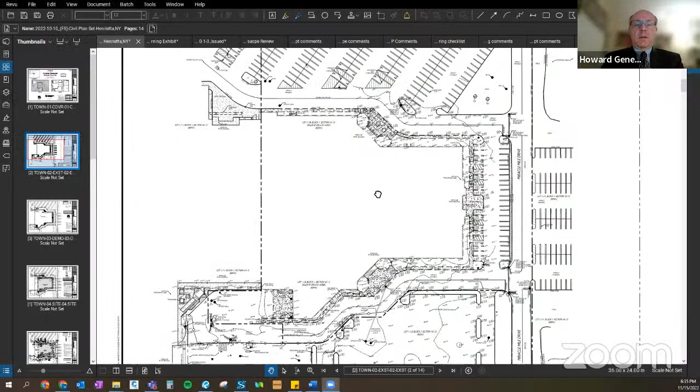Basically, the application is to... do you mind if I share my screen so I can show everyone? Sure, that's fine. Let me know if everyone can see the screen. Yes, we can all see. So the site's located along the Miracle Mile Drive loop in the Marketplace Mall, adjacent to Hylan Drive. Just for context, north is up on the page.

The existing Macy's facility is essentially abutting this property line here and takes up this part of the shopping center development. If I switch to the site plan, you can see that it basically takes up the same square footage, and the overall logistics of the internal loop roads and driveways as part of the application aren't changing. So should the existing fire truck be safe to maneuver around the existing shopping center today, it should be the same for this proposed project.

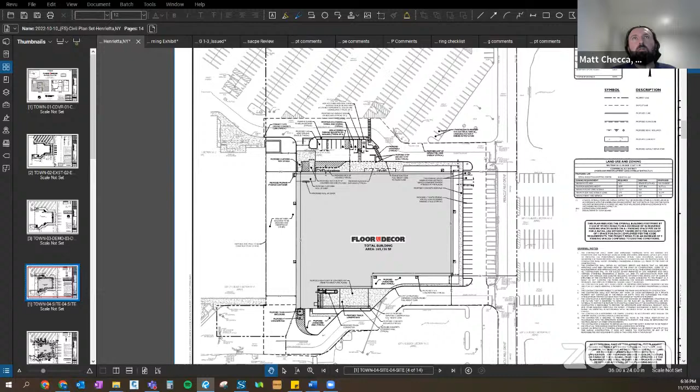Is the building going to butt up against the existing building? No, we're providing a 60-foot buffer between the existing building, just along the property line, and our new facade, between the existing shopping center and the proposed retail facility for Floor & Decor. In communications with the landlord, it was a win-win for both parties. Floor & Decor specifically likes their building as a standalone space, and the landlord requested a buffer between the existing shopping center and the new facility.

We just want to put it on record that this 60-foot courtyard space, as our internal design team is calling it, is not part of this application, and it will be permitted at a later date, subject to the application from the landlord. Floor & Decor's responsibility will only be to stabilize this area for soil erosion purposes, and I believe they're in discussions with the landlord on what type of material that stabilization will be, but it's likely to be gravel.

Does it make sense to have gravel with fire apparatus possibly having to go through there? We can stabilize the gravel and make it a little compacted. We just didn't want to put any hard impervious surfaces there due to the unknown nature of what this courtyard, or this 60-foot area, is going to be. There is plenty of maneuverability around the facility for a fire truck to access the building should there be a fire on the site.

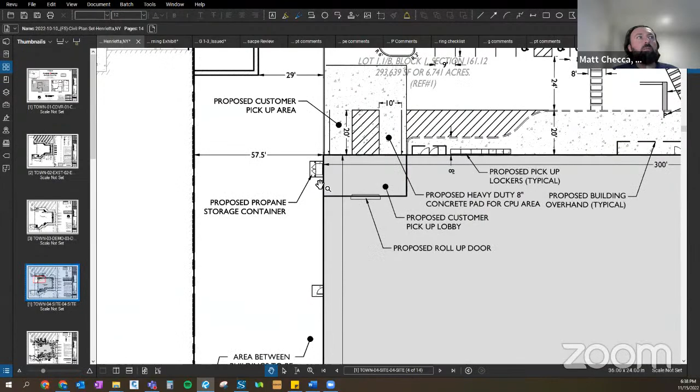Are there bollards or stanchions at each end of the 60-foot buffer? We currently don't provide any. There are some at features like the proposed store enclosure for utilities, but should that be a condition, we'll be more than happy to provide bollards if the board thinks that's necessary.

Immediately to the upper left of where you have your square there, can you identify that for me, please? What was that square you were just circling?

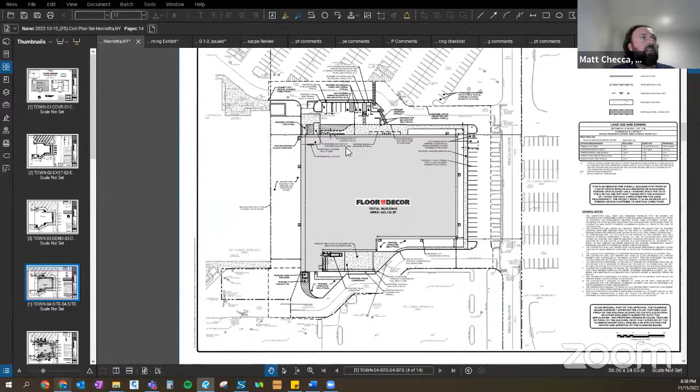Sure. So this existing utility enclosure is transformers and electrical equipment. The proposal would be to remove this screening wall around these utilities. Currently on site, if we go to the street view, it's this enclosure here. So what we're proposing is removing this enclosure so we can get free access to the utility enclosure, and then we are rebuilding a similar screening wall in its place. This will be a brand new enclosure as part of the project.

What we're proposing to do, if we switch to our landscaping - one of the comments from the Conservation Committee was to screen this area, which we have no objections to. We were planning on screening around that enclosure to make it more appealing to the public eye. Screening with what? Just low level planting, some evergreen trees, a variety of plantings based on the plant schedule and the town requirements.

So you're removing the existing brick wall. Are you putting back any hard surface as well? Yeah, there will be a brand new screening hard surface around the utility enclosure, and then we're proposing further screening just adjacent to that wall. Very good, thank you. That's what I was alluding to as far as the hard surface. Will it be brick? What will that hard surface be?

The enclosure, yes. Julie or Elizabeth, do you want to speak to that? I'm not too sure - basically matching the materials that were passed around, matching the new building, etcetera. Understood. I'm just going to turn it to the applicant who's here on the call, he can probably answer that a little more efficiently than I can.

Yeah, this is Julie Starzinski, Director of Construction and Design for Floor & Decor. Last name for the record: S as in Sierra, T as in Tango, A as in Alpha, R as in Romeo, Z as in Zulu, Y as in Yankee, N as in November, S as in Sierra, K as in Kilo, I as in India. So we're actually planning on using CMU, and then we will end up painting it to match our existing building colors.

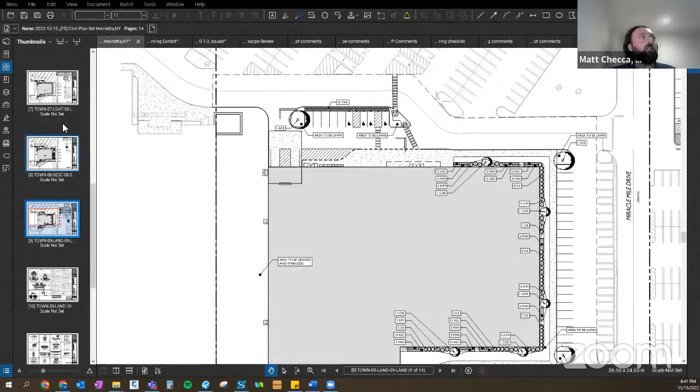I'm all set, thank you so much. Thank you. The chair will recognize Mr. Eckert. Thank you, Mr. Chairman.

To piggyback off that same comment, the building's not CMU, it's precast, right? That is correct. So you're going to use CMU but just paint it to match? That is correct. It should be an Urbane bronze color by Sherwin-Williams. But it's not shown on the elevation though?

We will make that updated. It should be. All right, well, I guess I'd like to go back to one of my first comments here.

I guess I was understanding that the main entrance to this building would be facing east towards Hylan Drive. I don't know if that was a previous submission or concept that's come through and now it's facing north.

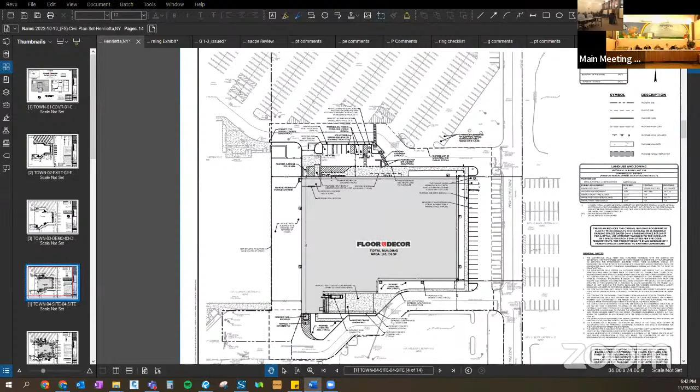The existing building currently faces—this is our existing conditions plan—the existing building does face to the east, the main entrance, and it's easier to show on an aerial, that's why I keep switching back to this. But the main entrance as part of the Macy's facility was located to the east. There are two separate entrances to the north and south.

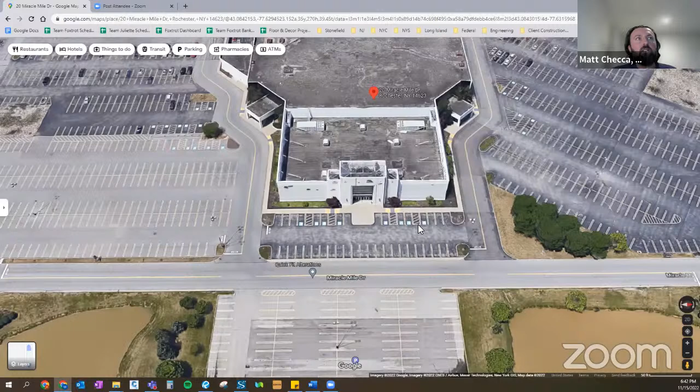The plan would be to demolish these two entrances and remove the main entrance as well as the ADA parking spaces. Swapping to the site plan again, the main entrance now faces the main parking lot to the north. In replacement of the existing side entrances to the Macy's facility, we're making the building a little smaller, so we added a parking lot in replacement there.

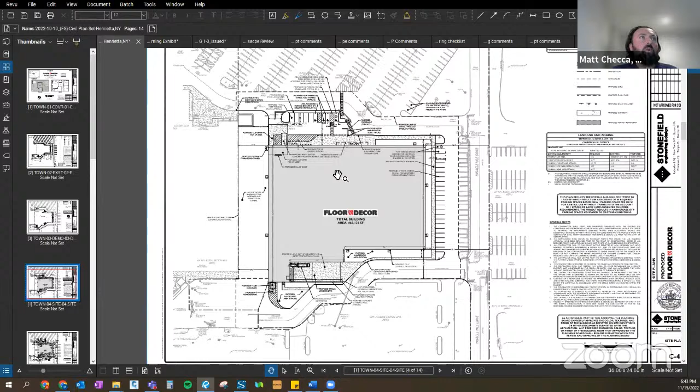Similarly to the south, we are mirroring the loading bay, and the loading bay will be facing west, removing that existing entrance that's currently there. It's important to note that this layout does reduce impervious surfaces—we are increasing pervious landscape surfaces by approximately 18,000 square feet, which is a little over a quarter acre.

Yeah, I understand that, but I thought I saw a concept before that came across through the town that showed the main entrance to the east. I'm not too sure, I don't think that was something that we prepared, no.

We did have an administrative review a few months ago, about 6 months ago, but that was a proposal to keep the existing building. Due to some construction issues that were encountered, the plan is now to demolish the existing building and replace it in kind. Maybe that's what you're referring to, but the plan has always had the existing entrances to the north of the project area.

I'm not sure I understand why the storefront would be to the north side instead of the east, which is the main street frontage at Hylan Drive. That would make the east facade the standard facade—just a very blank wall with coloring facing the main frontage to Hylan Drive.

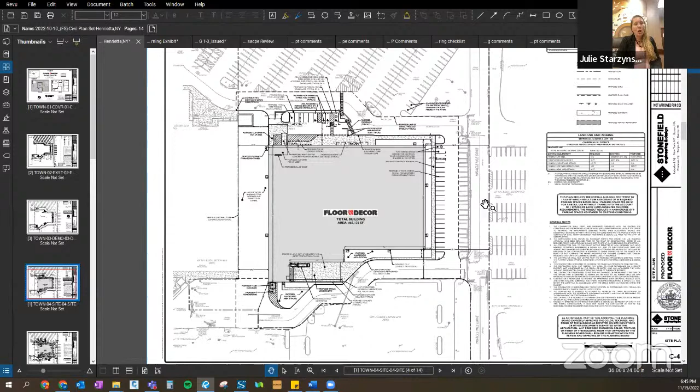Yeah, I can answer that question. In discussions with the landlord, he's thinking about putting an out parcel in the parking lot closest to Hylan Drive. So we needed to change our storefront entrance to the north side of the building so it's visible to the public.

I'm sorry, what's that out parcel now? The landlord is thinking about putting an out parcel—he hasn't gone into specifics, but when we talked with him he said he wanted to make sure our entrance was visible, that's why it's on the north side. So if the landlord decides to put an out parcel in the parking lot closest to Hylan, there's that option and it won't block our entrance.

Okay, well that would still have to be approved by the planning board, and now we're going to be looking at a solid wall towards Hylan Drive. You're putting the side of the building towards the main thoroughfare of Hylan Drive.

That is correct, we are. And right now the landlord has not given us any sort of timeline for that out parcel, so I don't know if he's putting that in with the 60-foot corridor between our space, our courtyard, or if he's doing that at a different time.

I'm not going to vote in approval of a project that doesn't put the store frontage towards Hylan Drive. It's the side of a building, a concrete solid wall that's going to look terrible to Hylan Drive. The store frontage going north isn't going to be visible from Hylan. It's barely going to, and at 1,000 feet away, it's not going to be visible really from Jefferson.

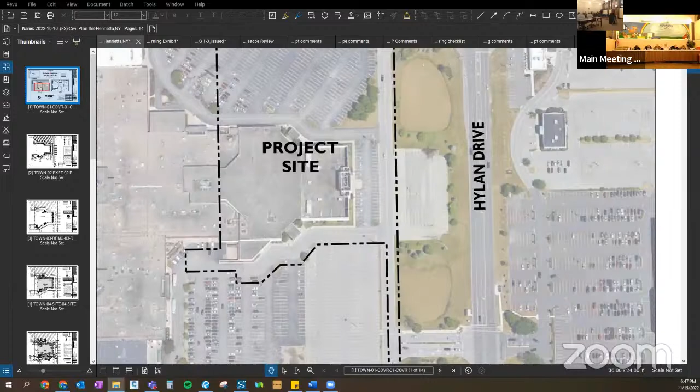Being at the site and navigating around it, I think that entrance on the north side is very visible, especially from the intersection with the traffic light. Using your same methodology, on the north side there's an out parcel up there now that can be built on, which was already approved, in fact approved for another restaurant that went elsewhere. There's an out parcel there that would block that frontage as well. Will it block it to the north? Yep, well it would have, but now you're going to own that northern parking lot, correct?

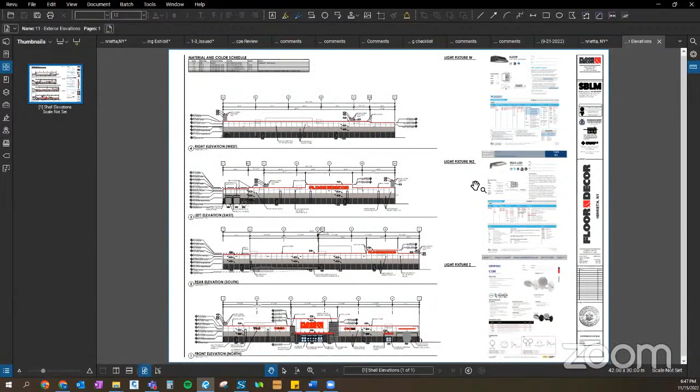If I could jump in, this is Eric Wright with Wilmer Wright, Vice President Construction. Julie is correct, we do hope to develop an out parcel in that parking field to the east. In addition, having the main entrance on the north side is driven partially by the parking fields to the south being controlled by the University of Rochester. So naturally the retail corridor and parking areas are to the north of the site, as opposed to split between the north, south, and east.

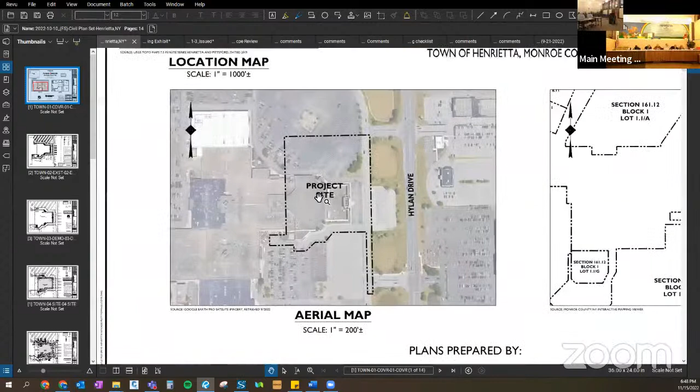Do you have more of a satellite image on that? Can you go further to the north? So the black line—okay, go back to what you had. Is that black line your limits of disturbance? No, that's the property line. Our limits of disturbance is basically just around the existing facility. So just north of that black line is that rectangle going north. There you go, that's the out parcel.

Eric, I understand that, but the out parcel on Hylan Drive never goes through, and the side of that building is always facing Hylan Drive. We're looking at a concrete wall, which I'm not in approval of. I don't know why we can't either dress it up or make it look like a storefront. I don't know why it would be moved—the storefront's been at Macy's for decades, on that east side, and nothing's ever been put into that out parcel on the east side. Putting the main entrance on the north side instead of to the east towards Hylan Drive doesn't make any sense to me. I don't know why we can't have store frontages facing our main thoroughfares.

So I'm okay with dressing up that elevation, but I cannot have an entrance on that side. I want to make that perfectly clear—we are a one entrance building. I can definitely dress that elevation up and make it look more presentable to that drive, but there will not be an actual storefront there.

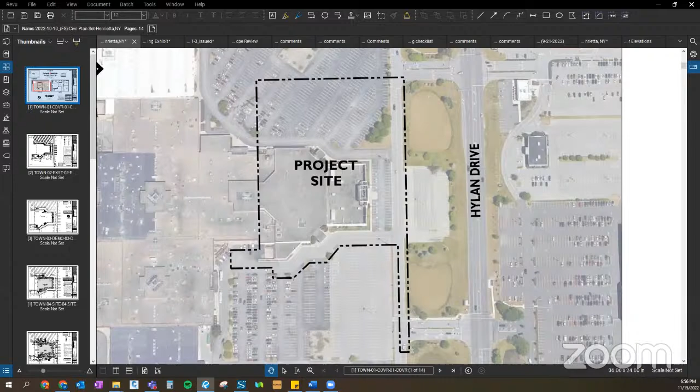That sounds fair, Mr. Eckert. Is that amenable to you? Yeah, I'd like to see that on the plan so we have an understanding of what it's supposed to look like before I vote on it. But I'll be frank, I'm not going to vote to approve this project without the store frontage facing Hylan Drive, or at least a large change in the facade, which we're not seeing right now. The store frontage should be on Hylan Drive like everything else up and down Hylan Drive. So those are my comments, sir.

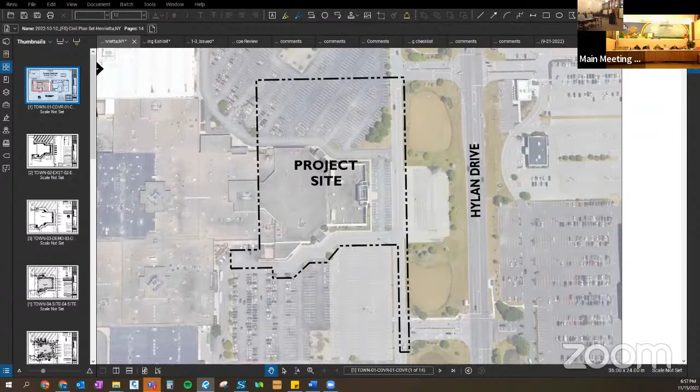Are there any issues with that? No, we spoke with our landscaping team and they have no objections to the comments. The only discussion point is based on the requirements, and one of them was in the comment letter. There was discussion about the landscaping needing to be 10 to 15 feet away from the foundation of the facility. I don't think we'll be able to meet that due to site constraints. However, we do show plantings along the foundation just to add more green to the project. That was one of the discussion items we had with the Conservation Commission. So that was really the only one we had objection to.

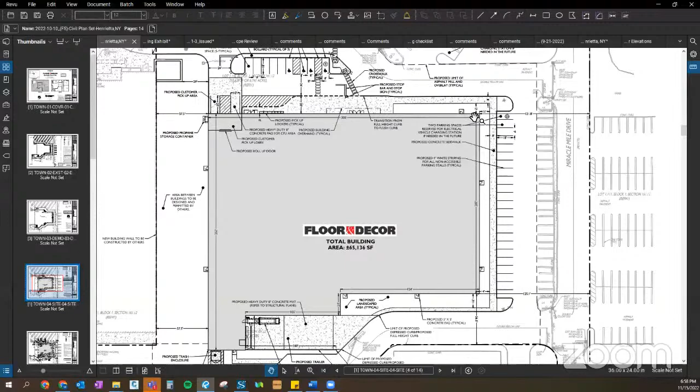All right, how long is the land lease on this project? Julie, can you answer that? Eric, I think we had done a 15-year lease, is that correct? Yeah, I believe it's a 15-year base term with options to extend, but it's a minimum of 15 years. All right, thank you, no other questions, Mr. Chairman.

Thank you, Mr. Barley. The chair will recognize Mrs. Reynolds. I only had a question at the time about the space between the buildings, but those have already been addressed, and will be discussed further. I have nothing else at this time. Thank you, Mrs. Reynolds. I've just got a quick comment here.

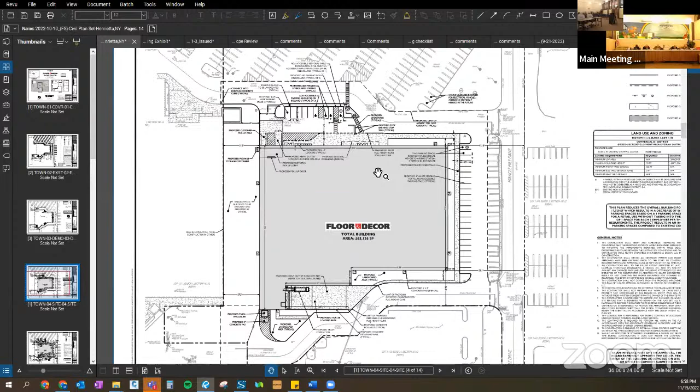I'm sure you saw Mr. Wilson's comments indicating that the fire department connection location is not ideal, as it is hidden on the fire department approach. Chris, can you weigh in on that and give us some perspective? Is it dangerous where it is, or would you prefer to see it more visible? I don't know if it's hidden or just not easily identified where it is now. I know the fire department wants to pull up and know exactly where it is. So what I'd suggest is that the applicant work with the fire marshal and Kevin to come up with a location that's acceptable.

Yeah, we have no objection to that. We'll be more than happy to work with the town consultants to provide a useful area that meets everyone's needs. Okay, and to go back and piggyback on Mr. Eckert's comment a little bit, Julie, what thoughts might you have for dressing up that side of the project? Do you intend to have a sign on that side of the building?

Yeah Matt, can you go back to the colored rendering again? Building elevations, thank you. So which one are we looking at? The east side, right? Second one down. The second one down right here. So you have the truck bays towards Hylan.

I should point out that we haven't completed our signage analysis yet, but there will be some sign variances required for number of signs overall for the business, and some of the wall signs, the larger ones that say Floor and Decor, will likely require variances for sign area. We intend to apply to the Zoning Board of Appeals for those variances once we finish the site plan process.

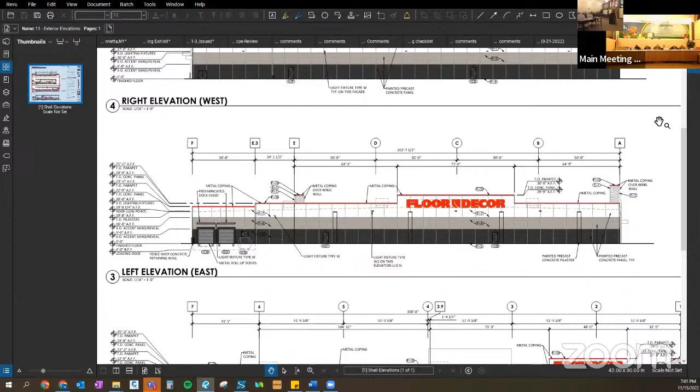Okay, can you go back to the front elevation, or would that be the north elevation? Just to compare the two. Whatever you can do to make it look like the front of a building is what we'll be asking. We can definitely look at that.

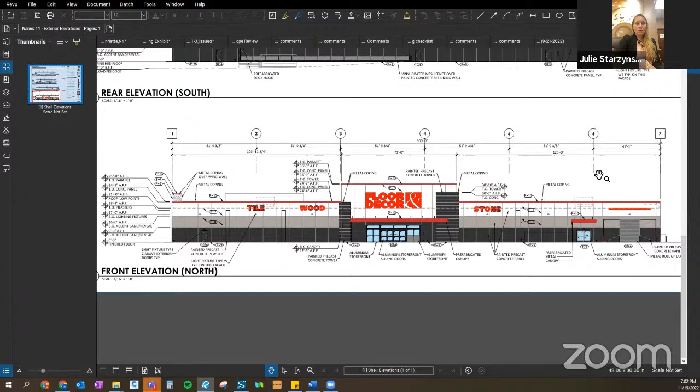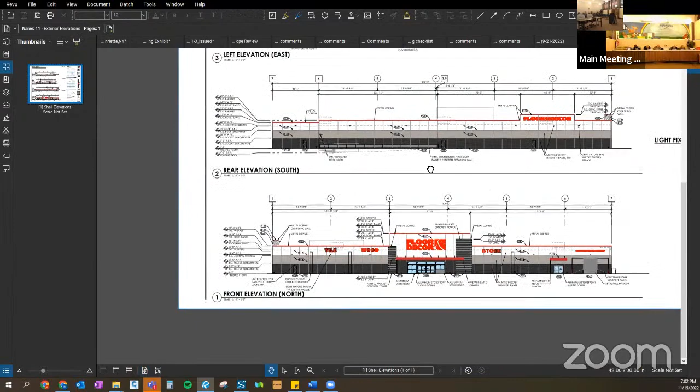I don't know if it's concrete towers or something to tie the front, or the north elevation, to the east elevation, but I can see Mr. Record's point - it would be nice. That's going to be a highly visible building elevation, and it would be nice to dress it up a little bit. Yes, we will take that away and dress up that elevation.

Okay, so Chris, can we? I know I agreed with you, right? I mean... I wrote that down for the...

But I think the main concern I see is the building elevation and the courtyard, and I think we can get some resolution on both of them. In the courtyard, we could bring that back as a discussion item, but for the board's review as well.

A conditional approval would be optimal from the applicant's standpoint. We'd certainly be happy to work with your professionals, or to bring the elevation back to the board if the board wanted to review it or have further discussion. But a conditional approval would be very helpful in terms of expediting the project and getting construction underway sooner.

And what if we do a conditional approval to review the plans in the courtyard and east-facing building elevations, but we are not able to come to an agreement?

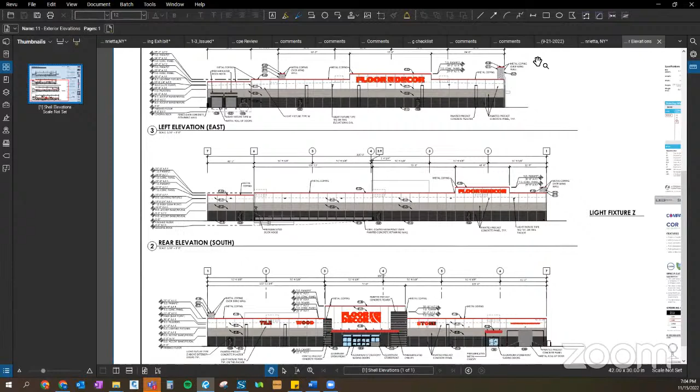Well, presumably the condition would require that the ultimate resolution of the so-called courtyard space, as well as the building elevation facing Hylan Drive, would be revised in consultation with the board or its professionals to either its professional satisfaction or the board's satisfaction, however it was worded. And if those conditions were not satisfied, then the approval would have a condition that wasn't met.

So like, we couldn't - exactly. Yep, like a total deja vu.

Yeah, if I can interject - practically speaking, we're back here in a month. Practically speaking, what's going to happen if we get a conditional approval between now and 4 weeks from now?

Well, if we had a conditional approval, that would enable us to begin and commence the appeal period. It would enable permit applications to start moving forward in terms of demo. So there's a lot that could be happening during that time period that would help the project move along and be completed more quickly.

And if you're unable to secure the approval of the board with the proposed revisions to the courtyard and to the Hylan Drive facing elevation, where's that going to leave you as the applicant?

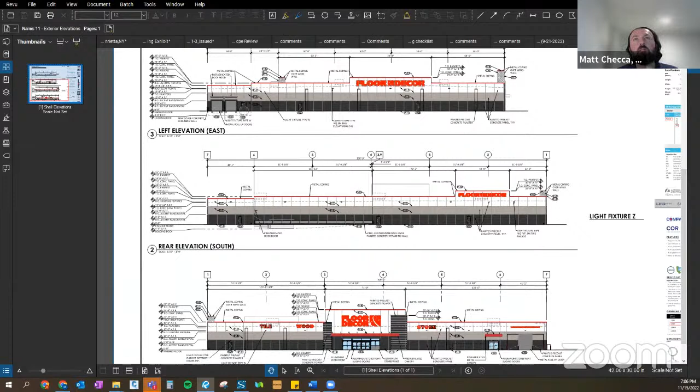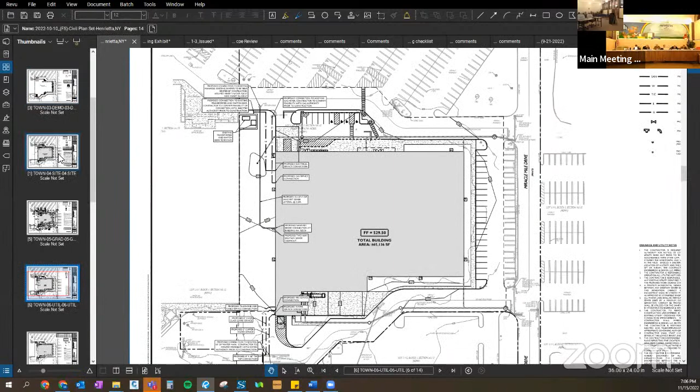And I have a question, and I'm not sure if this is for Eric or not, but whose responsibility is it going to be to make that courtyard nice? Make it a lovely walkway, put benching on there as a walkthrough. I just brought up the images that are out at Eastview to kind of share with some of the folks sitting next to me. There's really nice grasses and landscaping along that walkway. Is that the responsibility of Wilmorite?

Yeah, that would fall on us to make sure that when we decide what we're doing, we turn it into a beautiful space, but also maintain it as a beautiful space. So I think we can make that commitment that we would maintain whatever is being proposed there as an ultimate solution. But we would also maintain this temporary area that we create with the grass area and stone walkways. And I think that can be a great interim amenity as well.

And this is our, it will remain our property. So basically the leased land will be the edge of Floor & Decor's building, and it'll be our responsibility to maintain that.

Okay, thank you for that. Mr. Mastrella, do you have any more comments, sir? No, so yeah, I mean, based on what I've heard, my suggestion would be that if there is going to be a conditional approval...

...that it be with the understanding that the planning board is going to approve the elevation, so actually the east and west side of the building, the courtyard and the east elevation. I don't think that's something that you can, on a project of this scope, leave entirely to staff. That said, it doesn't mean it's going to take a world of work to get there, but obviously, the sooner you see it, the better off everybody is in this.

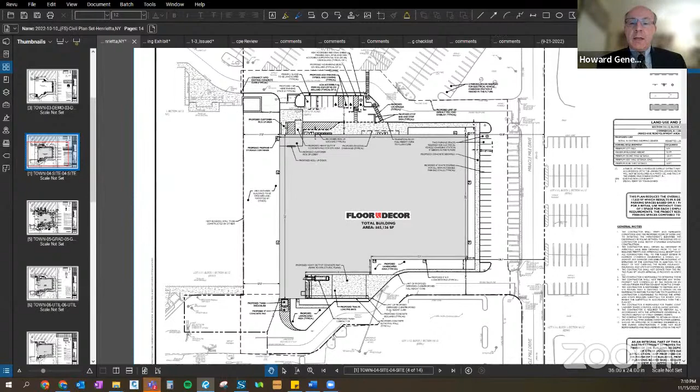But I can tell you what I'll be voting for approval on. Just for clarity, if I could ask this question concerning the Highland Avenue frontage, Julie had indicated earlier some things that can be done to dress that up and break up the monotony, add vertical elements, add towers, etc. Of course, you haven't seen that yet.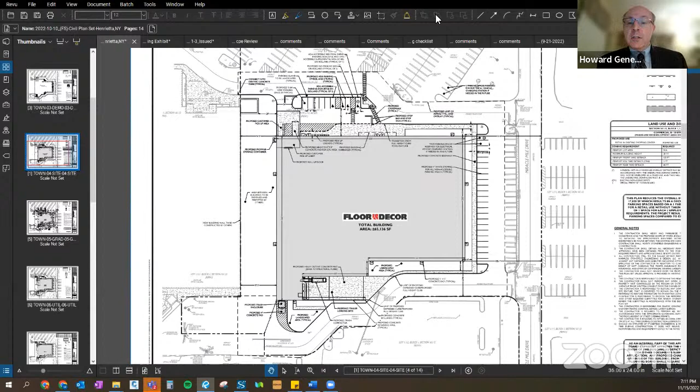We haven't developed it yet. Our goal would be to come back with something that's attractive and to your liking. But I want to be clear: if you're suggesting that frontage could be dressed up in a way that would be satisfactory, or if you're suggesting there's no set of circumstances under which you would grant approval that does not have the actual entrance facing Hylan Drive, because from a physical dimensional standpoint, as Julie's indicated, there's just not adequate space to fit what Floor and Decor needs to do in order to build, stock, and operate their store.

So I'd like to make sure we're all on the same page on that point. Howard, I'm not sure the frontage there was certainly adequate for Macy's to have an entrance. That was their main entrance because it faced Hylan Drive. That is where we'd like to see main entrances facing the main roadway going by.

You want to dress up the frontage. Quite honestly, I call it putting the back of the store towards the main frontage, and that's not what I, as a planning board member, am interested in seeing. I am one member of this board, so I'm interested in seeing the storefront towards Hylan Drive. If there's an accommodation that can be met that satisfies the majority of the board, in between what you have now and what I'm looking for, then that is, I guess, the condition you're looking for.

So I do want to address that real fast. I need a minimum of 250 feet on my store frontage based on the layout and flow of our space. I cannot get 250 feet on the east elevation, and that's why we've moved the storefront to the north elevation. Operationally, we cannot make it work, and it needs to be 250.